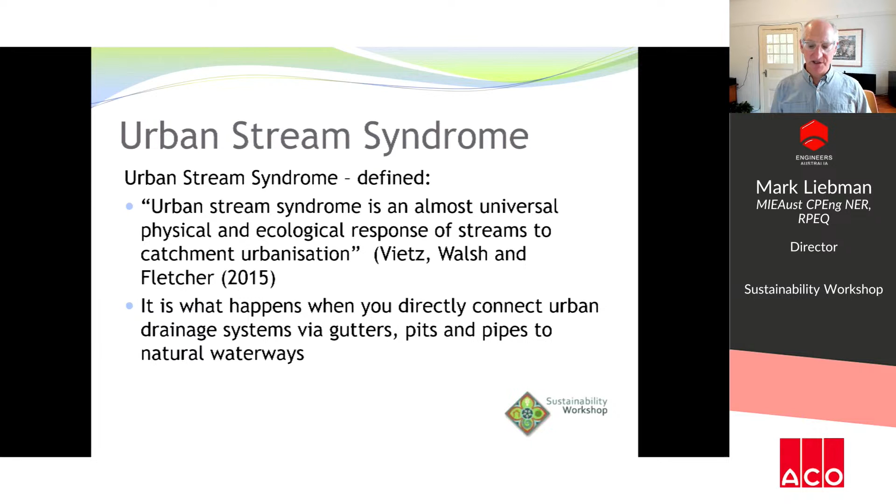This slide shows the hydrology of a natural forested land use at left. Most of the precipitation that falls on the forest returns as evapotranspiration. Some of that water infiltrates where it provides absolutely significant base flows, which sustain our creeks through dry periods. And you get a small amount of surface runoff that happens very infrequently.

If you compare that to the urban water balance shown in the middle of the screen, you can see there are some pretty dramatic changes. Very little of the precipitation that falls is returned back to the sky through evapotranspiration because we simply cut down all the trees. You get a dramatic increase in the frequency and volume of surface runoff, and obviously the quality of that surface runoff is degraded quite dramatically. And it's also logical that if you seal the land, you stop infiltration. Using water-sensitive urban design, we have an opportunity to try and restore some of that water balance.

We can see the changes in numerical terms in this slide. I took the opportunity to model a 1 hectare forested land use in the Hunter Valley, and that served as the pre-development scenario. I modeled what happens when you convert that forest into 1 hectare of industrial land use, which is completely sealed. The frequency of surface runoff changes from once every 2 years to 70 times per year.

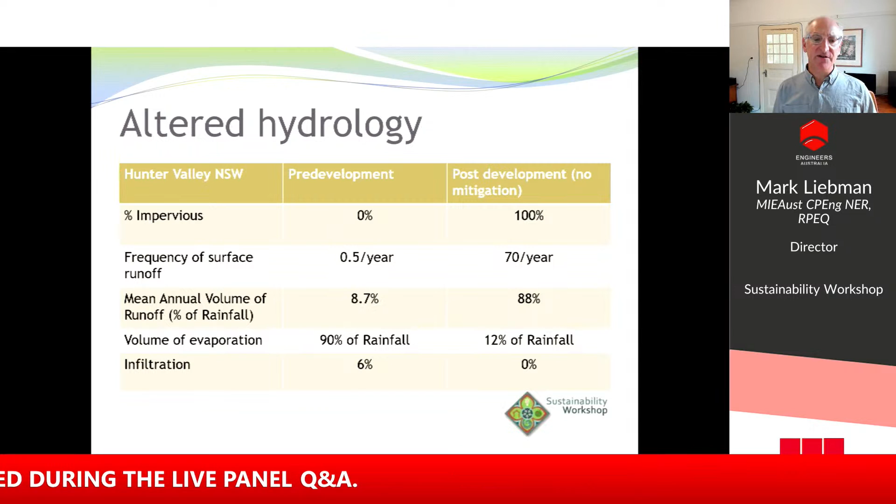Mean annual runoff volume has a 10-fold increase, and the volume of evaporation reduces by 7 to 8-fold. We lose all of the water that goes into the ground as infiltration.

I had a 40-year, 6-minute time step model. Pre-development, we found that we generated 20 runoff events, but post-development, we generated 2,760 runoff events in 40 years. You can imagine the impact of this increase in the frequency of runoff on the macroinvertebrates that would inhabit the waterways downstream of this hypothetical development.

Ladson, Walsh, Fletcher, Cornish and Horton have also been researching in this space. They've shown the correlation between stream health and total imperviousness. Imperviousness here is defined as the degree that impervious areas are directly connected to the receiving water.

For example, a shed in your backyard which doesn't have any gutters or downpipes and which is surrounded by green lawn is said to be disconnected. However, your house roof or a building roof which has gutters and downpipes and which is directly connected to the receiving water is literally directly connected.

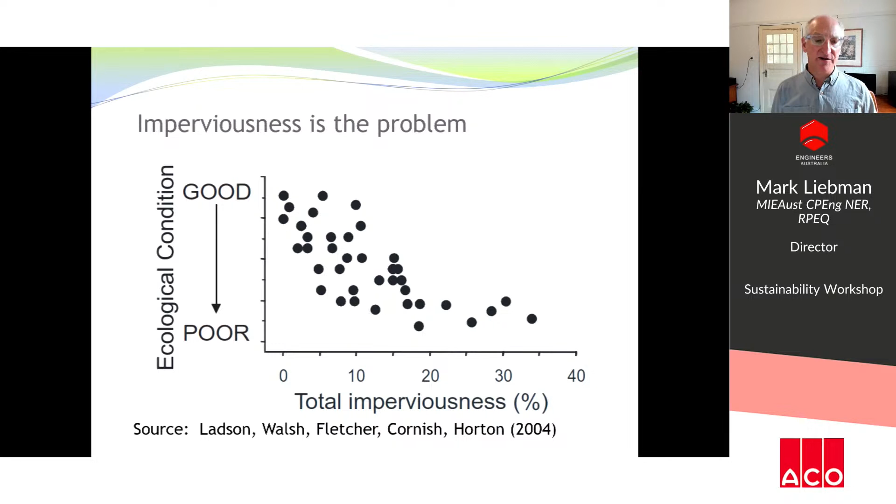So what is the solution? The solution is simply to find ways to disconnect the stormwater and to restore some of the lost water balance. Mimicking pre-development hydrology is a really big ask, and I don't think that we have the technical knowledge to do that at the moment. We may at some point in the future.

Rainwater harvesting and infiltration result in degrees of disconnection. Even small tanks and infiltration systems work really well to mitigate the impacts. Obviously, larger tanks and larger infiltration systems will work better, though there are diminishing returns.

In the past, every plumber could install a rainwater tank and build an absorption trench. This was standard practice in many parts of Sydney. It still is in the upper mountains where I live, and this may explain why our creeks are still in pristine condition.

The challenge of infiltration - there are certainly lots of challenges and limitations. It's not a practice that you can apply everywhere, but where you can, it works really well. Infiltration works really well in the short term. It can also work well in the long term if designed with effective pre-treatment, which is also maintained.

Without pre-treatment, sediment can cause clogging of the infiltration system, and this will reduce the performance over time. Our case study focuses on pre-treatment, and it demonstrates the importance of pre-treatment.

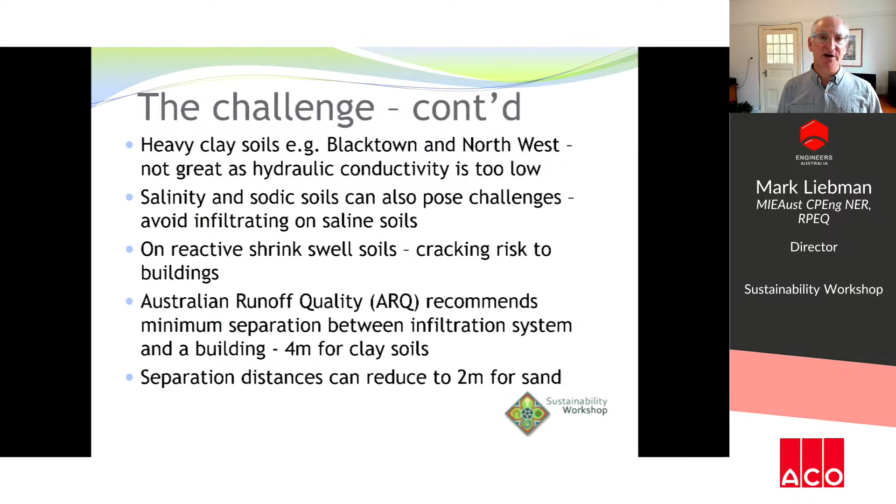I just wanted to share an absolutely excellent design reference. This is the WSUD Basic Procedures for Source Control of Stormwater, edited by John Argue and including other authors like David Pezzaniti. It includes a wealth of research by John that summarises his findings over pretty much a lifetime of researching permeable pavements and infiltration solutions. You can grab a student edition of this document on the web.

So how can we model infiltration systems? We can use MUSIC, which is a continuous simulation model. It's great for working out infiltration volumes and particularly good for helping you understand how frequently those systems are going to fill with water and spill.

I also use DRAINS software by Watercom. Actually, I typically use both softwares to check my designs because most designs are done to a specific design storm recurrence interval, for example a 1 in 3 month storm event or 1 in 5 year event. But you also need to know how these systems are going to perform on a daily basis. Recent updates to DRAINS make it much more flexible in the way that it models infiltration systems.

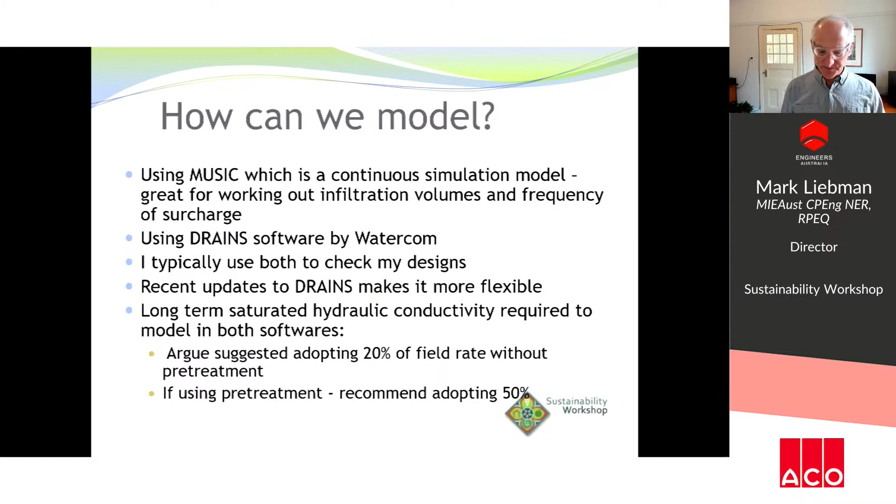So now we move on to the case study at Umina Beach. This project is located on the central coast of New South Wales. Central Coast Council were lucky enough to get a pretty sizable grant to construct a regional state-of-the-art skate park and pump track and sports facilities.

The problem that Central Coast Council were dealing with at Umina Beach was really challenging. They were dealing with extremely flat grades, poor piped infrastructure, and water ponding for prolonged periods of time in the car park, causing nuisance flooding to residents. There was also absolutely no discharge opportunity. We couldn't discharge to the ocean - an ocean outfall would have absolutely been knocked on the head. And we had no other piped infrastructure to connect into. Infiltration was the only option.

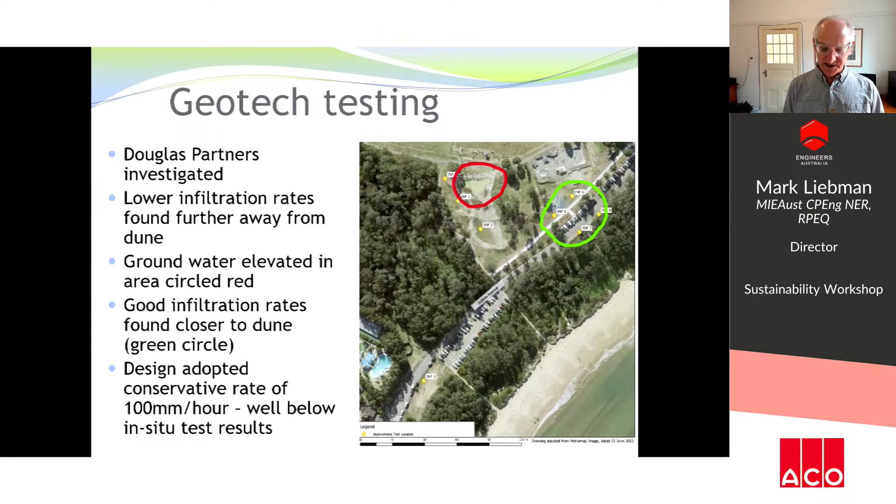So the solution at Umina involved bringing together 2 infiltration systems. The first system is the Hydrocon permeable concrete pipes, and the second system is the ACO StormBrixx geocellular stormwater management system. Hydrocon permeable pipes are a water quality treatment device - they provide the pre-treatment to preserve the life of the geocellular system.

They are made from permeable, no fines concrete. Water passes through the pipe walls and into the gravel surround. Research undertaken in Germany has measured the exfiltration rates of those pipes under different head conditions. The pipes play a critical role - they retain the majority of the sediment within the pipe while allowing water to permeate through the pipe walls. They're very easy to maintain.

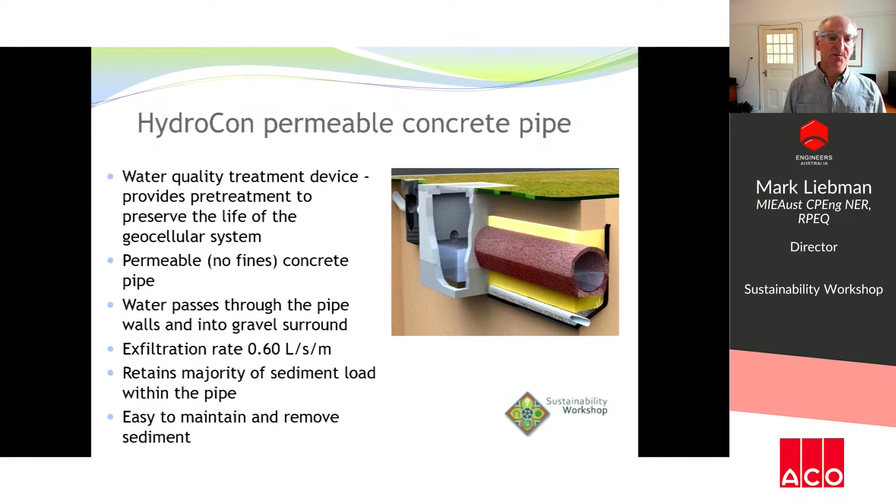ACO StormBrixx provide cost-effective underground storage. They have a porosity of over 95%. They're also backed by research undertaken by CIRIA in the UK, where use of infiltration for flood mitigation is mainstream. They have been designed to consider a creep failure mechanism for repeated loading, and they provide access for maintenance.

The design solution at Umina was to place a 500 mm HydroCon pipe inside a gravel trench and to have 2 rows of StormBrixx each side of the gravel trench.

Water comes into the concrete pipe from the road, it passes through the pipe walls while the sediment is retained inside the pipes. The water seeps into the gravel trench and then into the storm bricks. Water can seep out of the hydrocon pipe at a much higher rate than it can infiltrate into the ground. Therefore, water would build up inside the trench and be stored inside the storm bricks. Water would continue to infiltrate until the end of the storm event.

There's a major system overflow whereby high flows are allowed to flow through the hydrocon pipe system and into the parkland beyond.

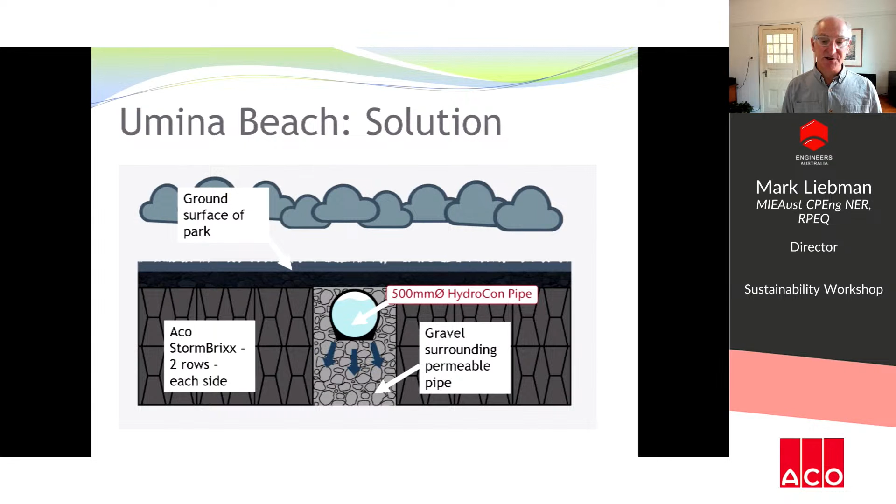I wanted to briefly review a number of projects that have helped inform the thinking, and have informed a lot of research and knowledge gained using these different products over time.

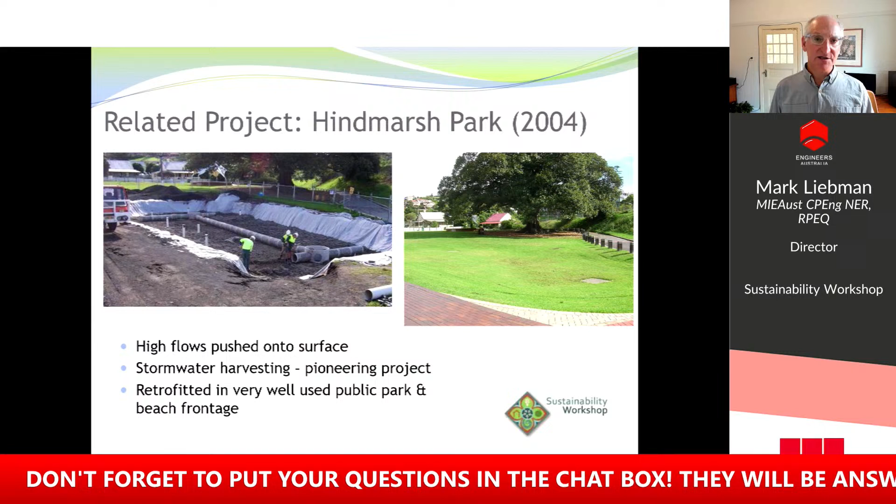The first project is located at Kiama in a well-used public park next to Black Beach. The system uses hydrocon pipes located within a grassed storage basin. Under low flow conditions, water flows into the pipes and seeps out into the surrounding sand media. Under high flow conditions, water surcharges up out of those pits and ponds in the basin, where it can flow vertically down through the sand media and be treated before being discharged.

Another project that we applied the same thinking on is the Ashgrove Estate in Regents Park. Here we treat stormwater initially in a gross pollutant trap. The water then flows into hydrocon pipes where we settle out any remaining sediment.

From there, under low flow conditions, water seeps through the walls of the pipe, and under high flow conditions it reports to the surface inside a detention basin. This detention basin is used for both water quality and flood mitigation purposes. Most of the time, the basin is a valuable public open space resource and it's very well drained.

A key take-home message here is that space in Sydney is at an absolute premium, and that we don't need to sacrifice public open space by sterilising that space with a stormwater treatment system.

A similar approach has been adopted by Blacktown Council for their bioretention basins, where permeable pipes are used to trap any sediment that passes through the upstream gross pollutant traps. In this context, the permeable pipes are designed to protect the filter media and to ensure that filter media, constructed in large part using very precious virgin natural sand resources, lasts as long as possible.

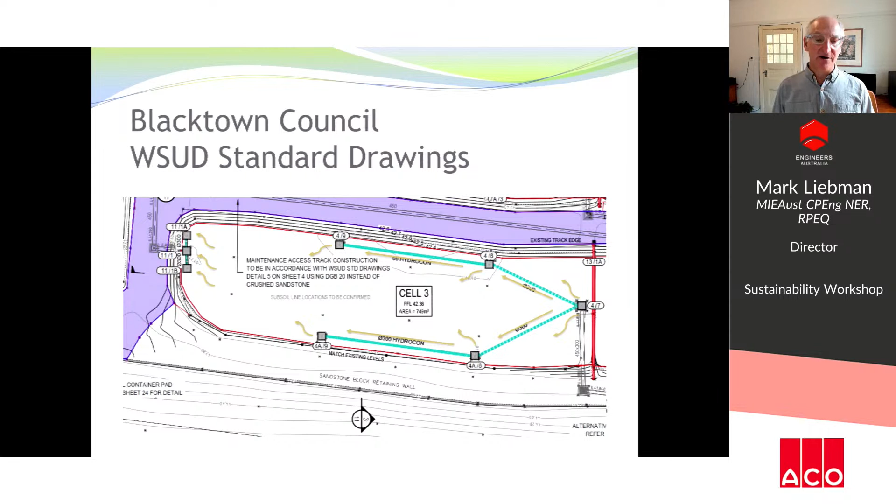I've also undertaken hundreds of smaller and larger infiltration projects in the Blue Mountains over the last 10 years. Absorption is a deemed to comply solution under the council's DCP.

Using ACO StormBrixx is a much more cost-effective solution than a traditional trench filled with gravel, which is only 33% porous, meaning only 1/3 of the volume of that trench is available to store water. You can compare that to the storm bricks, where 95% of the volume is available to store water. It means a much smaller footprint, less excavation of natural soils, and less waste management.

I wanted to talk briefly about maintenance, which is absolutely critical. It's really important to understand that if you can't maintain a system, then it is going to fail. That's a given. The first generation systems installed on the Central Coast lasted between 5 and 10 years before failing. I understand this to be more or less in line with John Argue's research.

All of the approaches shown today have maintainability built in from the start. Ensuring access for maintenance vehicles is critical — they need to get in close to be able to maintain these systems at a cost-effective price.

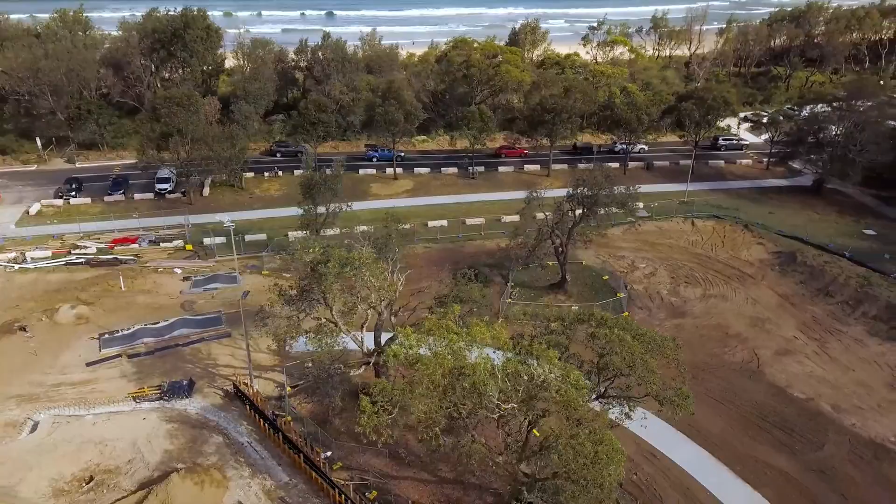According to a council representative, surface stormwater runoff on Sydney Avenue originally flowed to a trapped low point, consisting of a single pit with small PVC pipe outlets that regularly became clogged and took several days to drain to the adjacent reserve. The whole purpose of this project was to get the water away from the car park and put it underground, so it can naturally go into the subsurface.

The site was heavily constrained by the existing stormwater network, insufficient pavement falls, its surrounding topography, and environmental restrictions placed on ocean outflows. A solution would need to overcome these factors and function with the area's high annual precipitation and worsening summer storms. For this project, various drainage constraints meant treating stormwater at the source was the only feasible option, as opposed to treating water at the end of pipe.

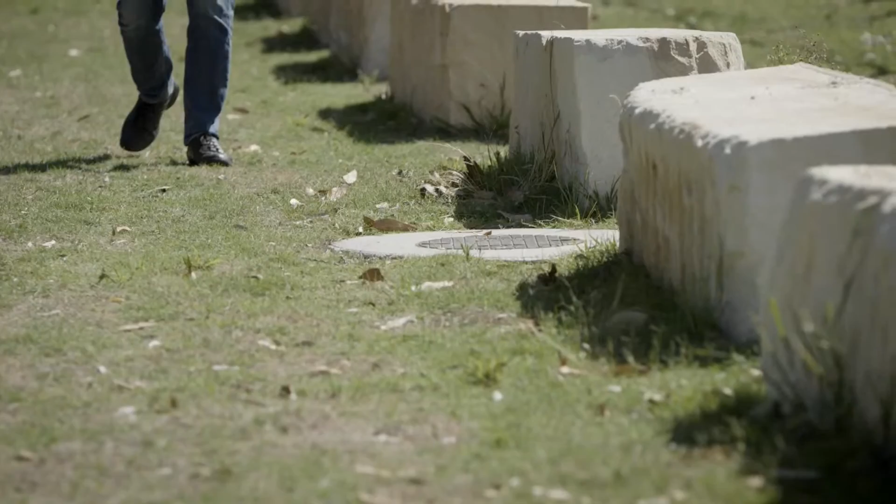Adding to the downstream stormwater infrastructure was simply not an option, except through an overflow pipe. As the sandy soils in Umina enable high infiltration rates, Central Coast Council sought to integrate an underground infiltration tank with an upstream treatment device.

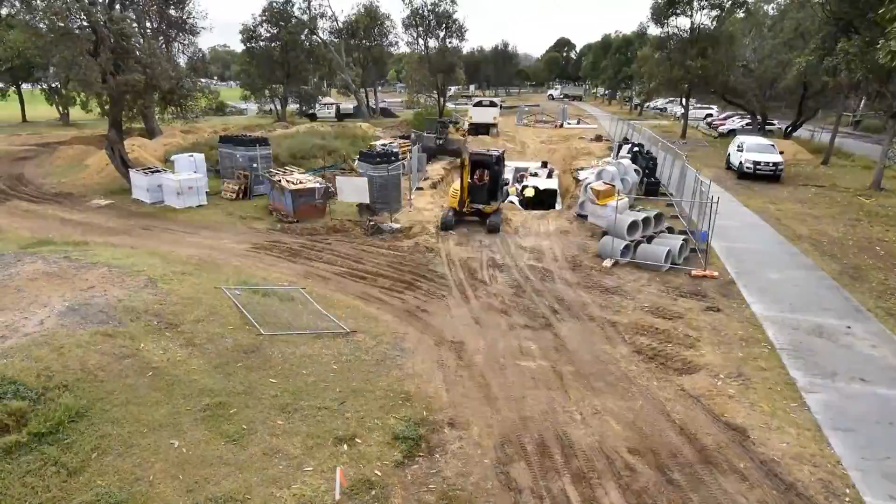Adjacent to the existing concrete footpath running alongside Sydney Avenue, Hydrocon permeable concrete pipes were installed between two twin ACO StormBrixx tanks, totaling 63 metres. The system needed to store the stormwater volume of a 1 in 5 year storm event.

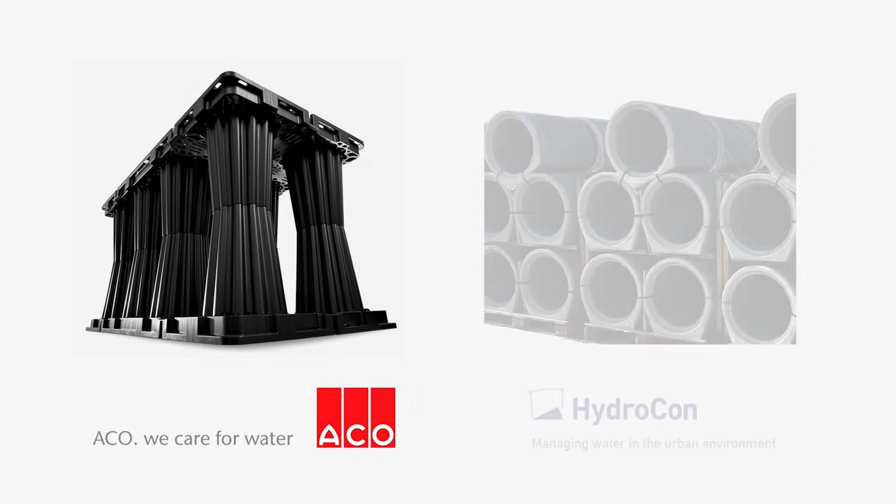This was a really unique project because it gave us the opportunity to bring together two great products, the ACO Stormbrixx and the HydroCon pipes. Whilst these products are often used independently, this project is the first in Australia bringing two manufacturers together to create an intelligent solution.

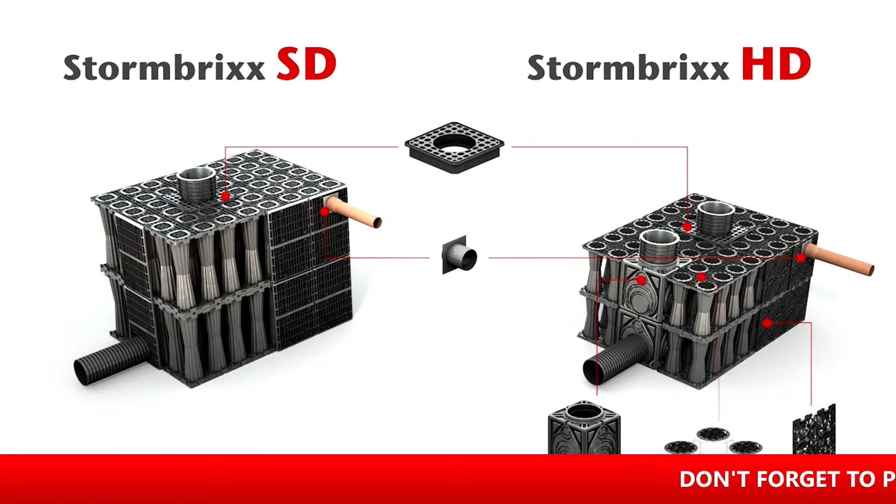ACO Stormbrixx is a unique plastic geocellular stormwater management system designed for surface water storage, infiltration, retention, and detention for light and heavy-duty applications. Strong and quick to assemble, the Stormbrixx tank offers optimum storage capacity with a 95% void ratio of total volume.

The ACO Stormbrixx provides a very affordable means of underground storage, and they have also been really extensively developed in terms of their structural integrity, unlike some of the first generation plastic products.

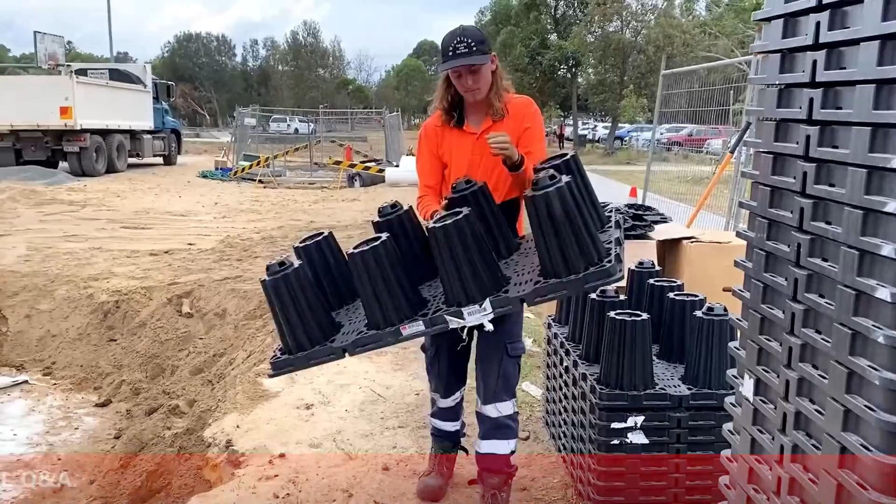According to the builder, the installation of the Stormbrixx tank was relatively simple. Once the trench floor was excavated and levelled, assembly of the plastic units was quick, with no real handling issues. They were very impressed with the system, ease of handling, how they locked together, the red clips that tied in the bottom and top levels, and the strength of the units once assembled.

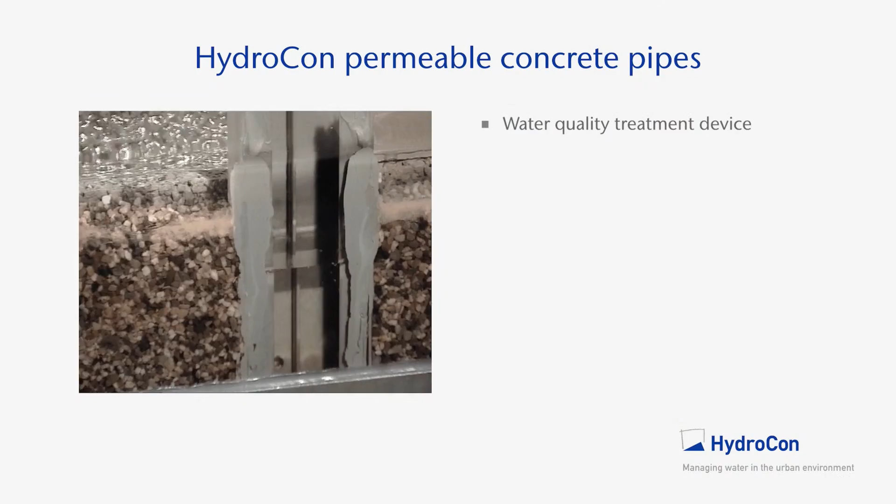HydroCon has been in Australia for over 20 years and specialises in permeable concrete pipes and pavers used for water-sensitive urban design. HydroCon permeable concrete pipes remove and retain stormwater pollutants within the pipes. Treated water exfiltrates through the walls of the pipes and is delivered to the subsurface of bioretention and stormwater filter systems. This prevents clogging and allows easy maintenance, also reducing the life cycle cost significantly.

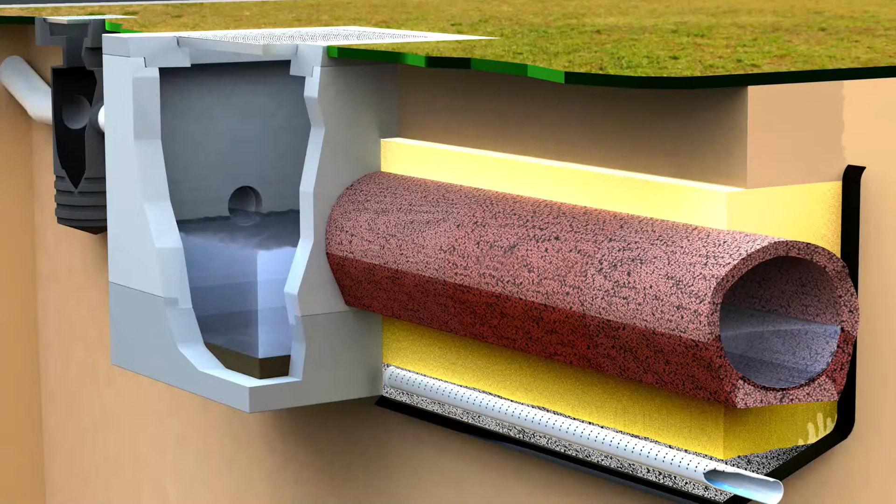Our products reduce runoff, local flooding, and improve water quality. Stormwater treated by HydroCon products can then be harvested for reuse or infiltrated directly into the ground.

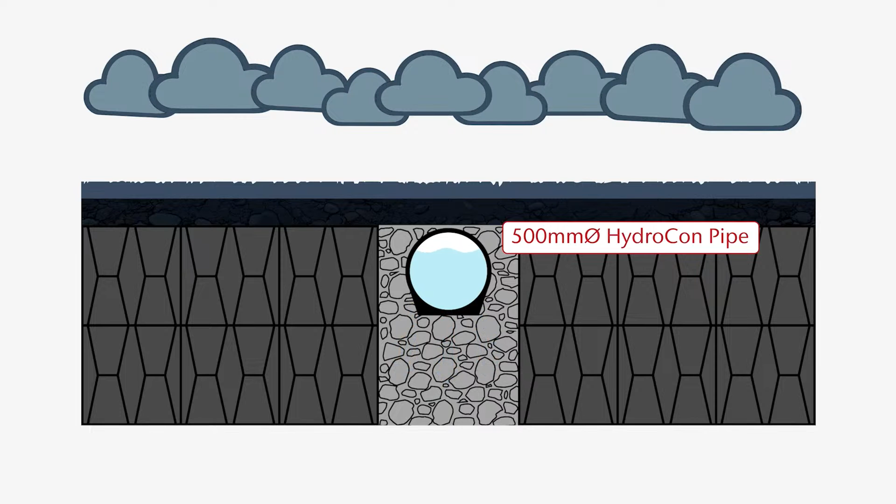Stormwater is collected from the roadway and directed to the HydroCon pipe system. The stormwater is then treated as it exfiltrates through the permeable structure of the HydroCon pipes and into the surrounding gravel. The water then enters into the geotextile wrapped Stormbrixx tanks for temporary storage.

During a storm event, the water table surrounding the tank rises. The tank allows excess water to be stored until the water table begins to drop following the storm event. The stored stormwater then exfiltrates through the geotextile wrap and drains naturally into the earth and water table beneath.

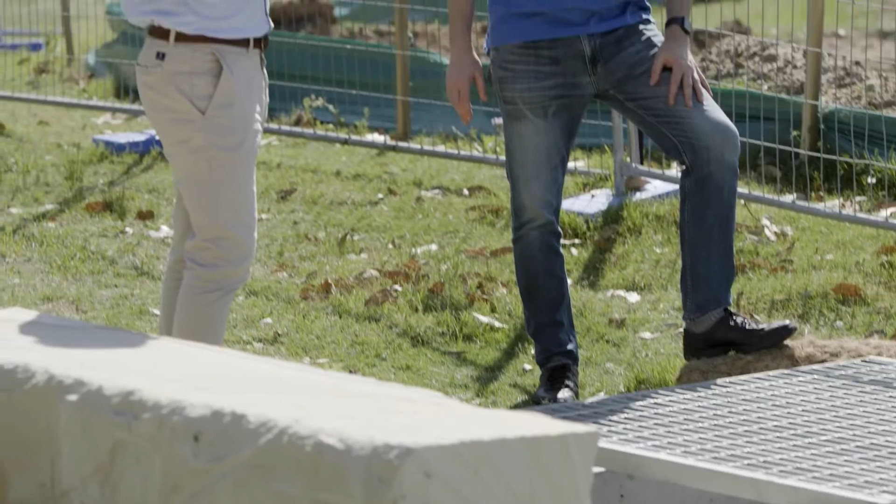Stormwater pollutants are retained inside the HydroCon pipes for removal during periodic maintenance. The infiltrated water through the soil has the added benefit of replenishing the local groundwater close to the tanks.

HydroCon pipes have a flat base that allows them to be easily positioned and quickly installed. They connect into each other and are laid at a zero gradient.

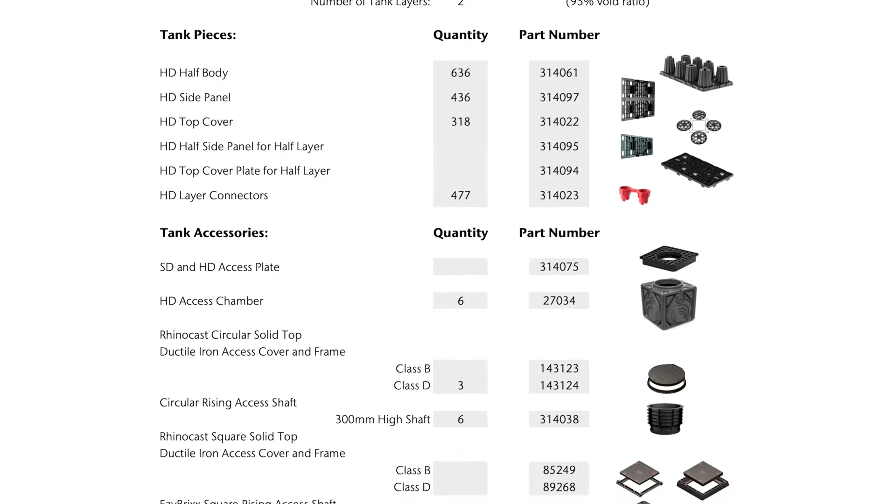At ACO, we are always ready to support customers with any design questions they may have. Initial communication with Central Coast Council was to provide information about the Stormbrix HD tank, the footprint, tank size, what volume, and what they needed from our product to achieve that sort of volume, and how it can be integrated with the Hydrocon pipe. We provided a bill of materials, a structural calculator based on CIRIA C680 to make sure the tank was going to be functional and performing to load requirements. Finally, a detailed tank installation drawing was provided to show the tank layout and location of the access points.

The ACO Stormbrix and Hydrocon system offers easy maintenance and inspection throughout its design life. Hydrocon pipes let water go through while keeping all the sediment and gross pollutants on the inside of the pipe, where they can be vacuumed out.

So they work as a really high quality filtration device. And what it does is it reduces the maintenance burden on the ACO Stormbrix, and we can extend the maintenance period on the Stormbrix right out.

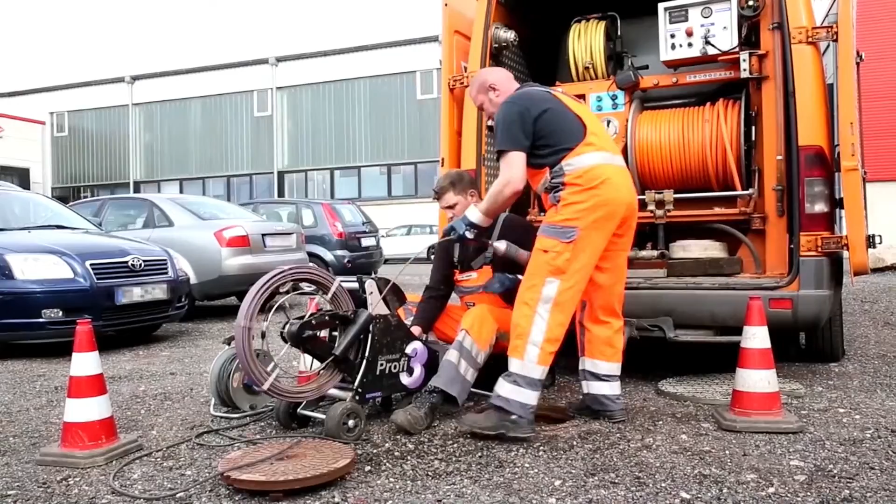First generation systems were completely closed up and you couldn't get inside them to work out how much sediment was in them, or even remove the sediment if they were full. The second generation systems, like the ACO Stormbrix, are open and accessible, you can get CCTV inside them, which makes life very easy for the guys doing the maintenance.

They simply drop a vacuum hose down it and a high pressure jet, and push all the pollution to one side and then vacuum it out of one of those pits. This system provides Central Coast Council with an easy to maintain and cost-effective infiltration system.

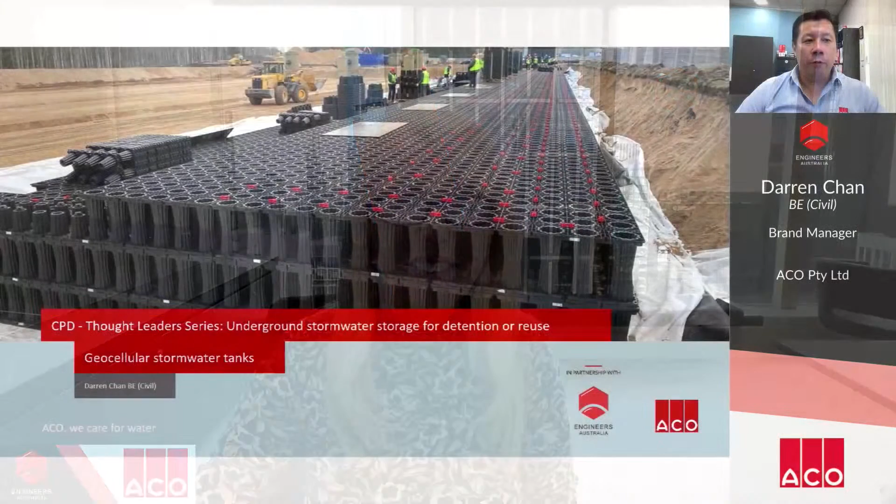Over the next 25 minutes or so, I'm going to describe the role of these plastic tanks, their characteristics, and offer you a guide on how to specify them.

Underground tanks are used in lots of projects as councils legislate to protect their downstream waterways and infrastructure. Managing both the quantity and quality of water being discharged off a site is only going to grow in importance, particularly as our cities urbanise and rainfall events intensify as the climate changes.

These days, larger areas of the built environment are being covered by impermeable surfaces, which increases the risk of flooding. Tank solutions are a conventional way to store and slow down surface runoff to pre-developmental rates, as well as replenish the groundwater at a more natural rate.

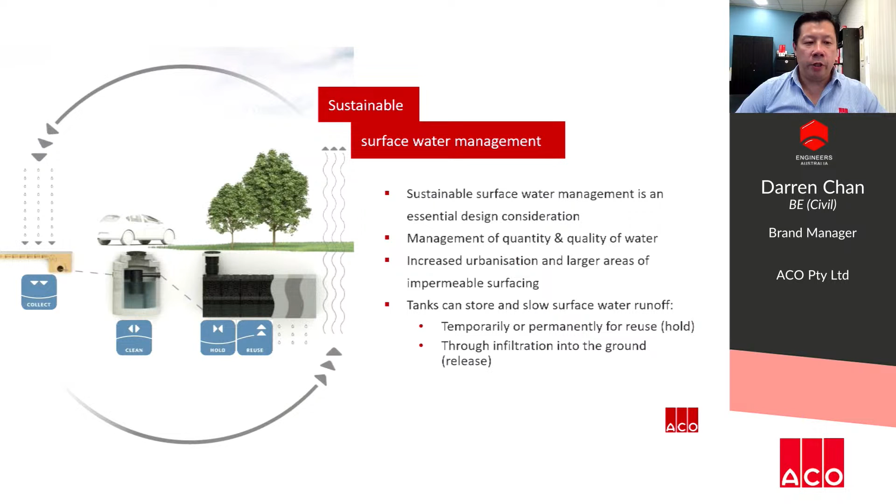These are the system elements that are designed to work with the natural water cycle. On a slab or pavement, drains are typically positioned to intercept or collect stormwater runoff, which is then treated or cleaned to prevent clogging or contamination downstream.

Some of the engineered tank solutions include cast-in-place, precast concrete tanks, arches, and plastic structures. We'll focus today on just plastic stormwater tanks, which can be easily integrated in a stormwater management plan for the infiltration, retention, or detention of surface water runoff.

Detention systems, also known as attenuation systems, are designed to spread the peak flow of a storm event. It does this by holding and releasing stormwater slowly, controlling the runoff to reduce the risk of flooding downstream from a development.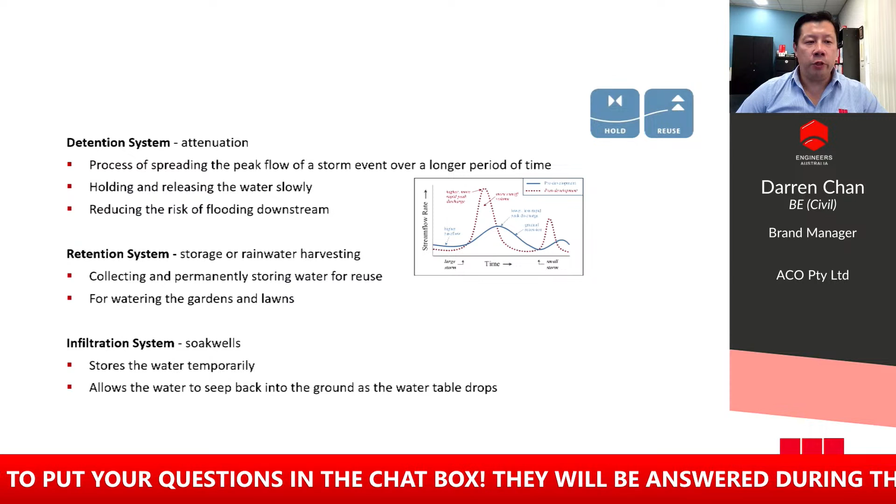A retention system collects and stores water permanently for reuse, for example, to water landscape areas or for firefighting purposes. Infiltration systems, or soak wells, are used a lot in sandy areas to temporarily store water, allowing it to naturally seep back into the ground to replenish a dropping water table.

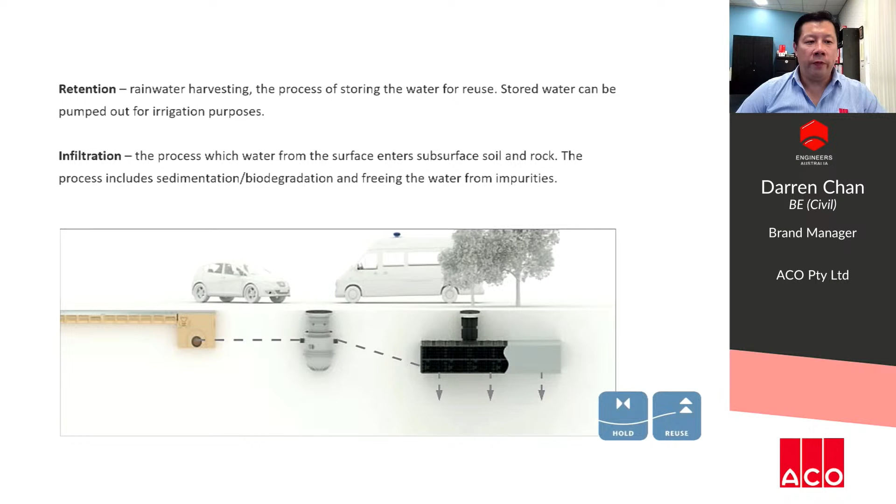To illustrate this, retention and infiltration are two common adaptations of these tanks to make the best use of captured stormwater. Retention is for irrigation or reuse purposes. Infiltration is where the soil can naturally free the water from impurities. In both cases, the water is used at or close to the source of collection without it flowing through to any downstream infrastructure or receiving waterways.

But if discharging into downstream infrastructure is the objective, then detention gives designers the greatest control over the quantity of water to enter it. In very simple terms, it's an easy calculation.

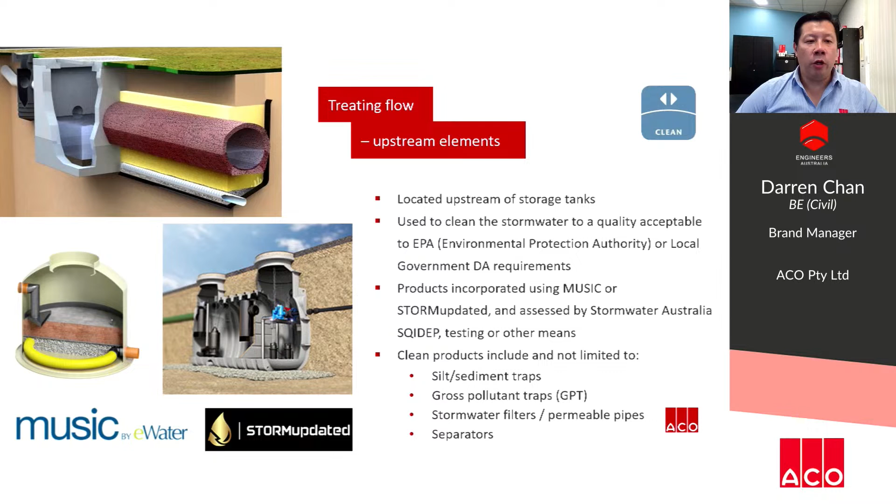Before I go on, I want to make special mention of two types of hydraulic control structures. First are stormwater treatment devices. These are located upstream of the tank, with their performance being individually assessed and governed by the EPA and local DA requirements. Depending on the project requirements, there are many types, from gross pollutant or silt traps, stormwater filters, permeable pipes, to even light oil separators used where hydrocarbons exist.

The other type of hydraulic structure are flow control devices, which control the release of water to prescribed rates downstream of the tank. These are typically installed in chambers with either purpose-designed mechanisms or just a conventional orifice plate. Both these hydraulic control structures aren't the topic of today's presentation, but I wanted to mention them as they are essential elements that affect the quality and quantity of water being discharged off the site.

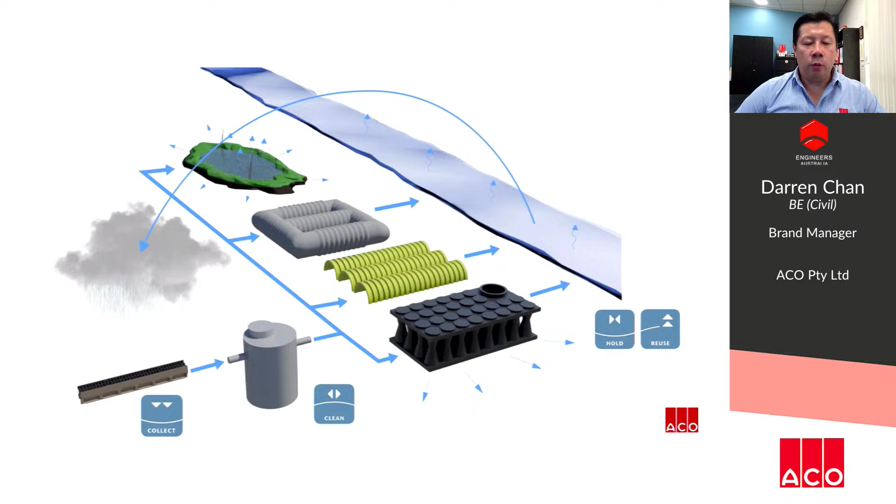So today, I'm going to focus on plastic tanks that can be assembled into producing underground cells for water storage. These can be adapted in a softscape where infiltration can be achieved. Here you can see them assembled, wrapped, and backfilled. They can be installed under slabs in commercial and industrial applications where space is a premium.

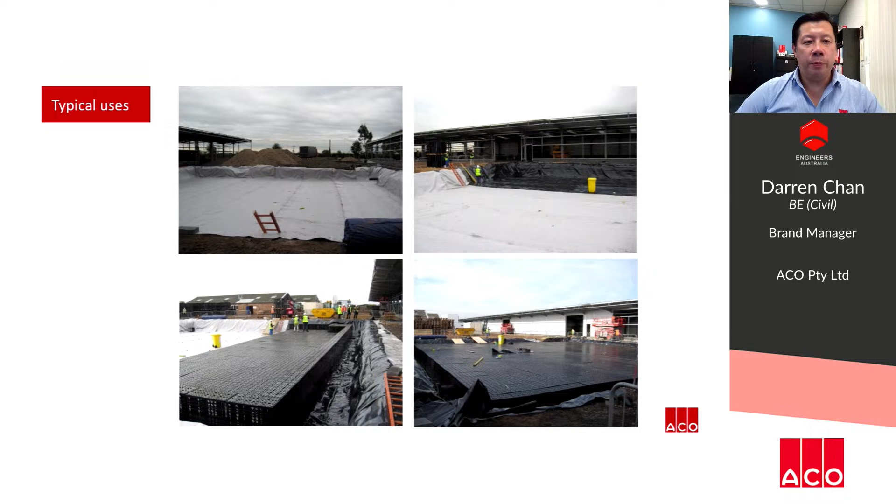This is an example of a tank being used for detention in Griffith, New South Wales. Designers had to deal with runoff from the site. The tank would store and gradually release the stormwater runoff into the council's downstream infrastructure, while also allowing direct access for watering the sports fields.

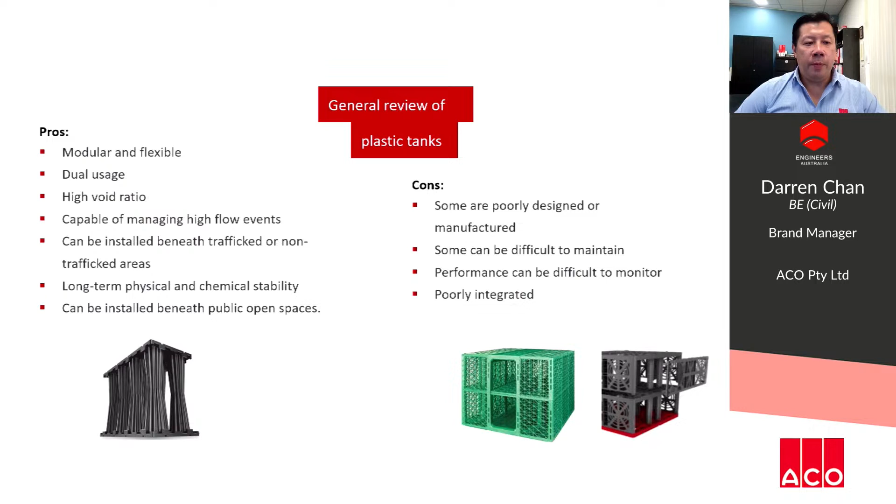Finally, the designer must ensure these products are integrated and meet the quality and durability requirements of the stormwater management plan.

So, when specifying plastic tanks, there are a number of things to consider. Councils, through their development control plan, will enforce compliance to regulations. They will specify the methods an engineer needs to use to ensure the property meets the stormwater management plan. This takes into account the volume of water that the property needs to manage from landscaped, hardstand, and roofed areas. Not only does the certifying engineer need to integrate the tanks properly, but as with all key stormwater products, the structures themselves need to meet minimum strength, durability, and quality requirements.

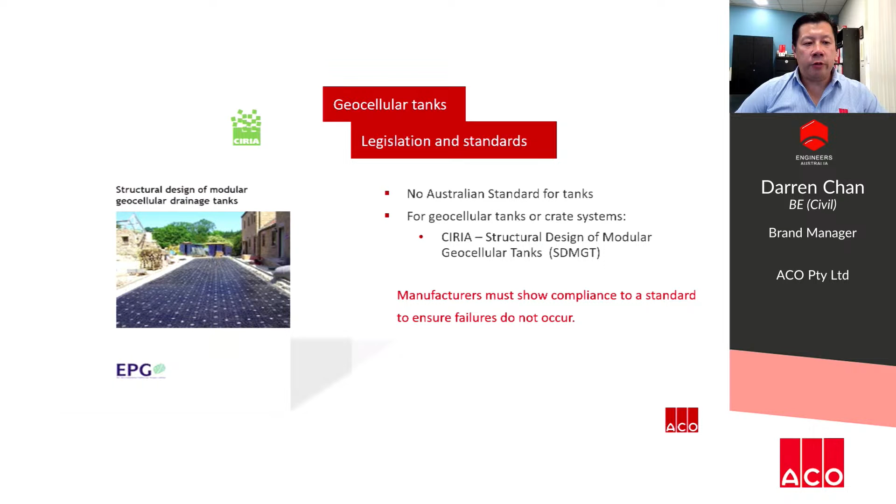In Australia, there are no standards that govern plastic tank systems. And the problem with that is that some manufacturers make claims about strength and design life that just aren't substantiated. However, there is a UK standard for plastic tanks called Structural Design of Modular Geocellular Tanks. It gives guidance on testing, structural design, construction, and installation. This is the gold standard to benchmark performance, and as such, manufacturers should qualify their products to this standard to ensure that failures don't occur.

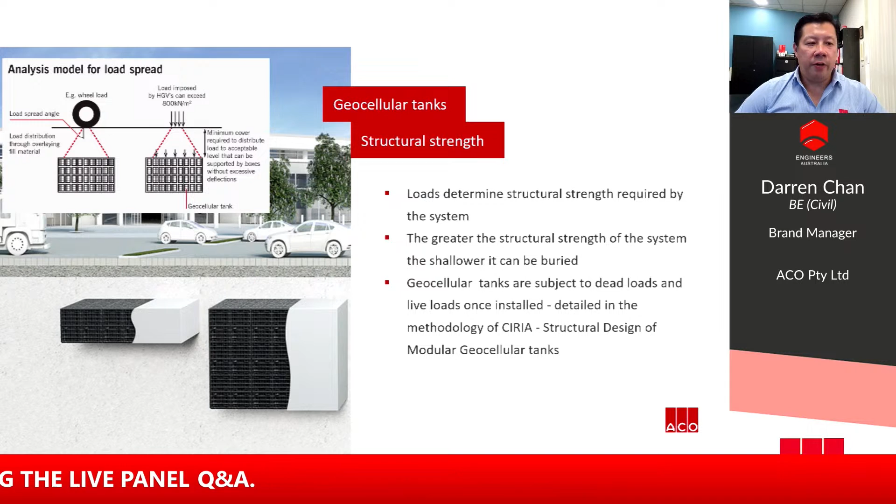A structural design should consider the load-bearing capacity of the tank. The stronger the tank, the shallower it can be buried, resulting in reduced construction costs. What determines the depth of cover required are things like the soil type, tank design capacity, groundwater level, pavement thickness, and design loads. The UK standard identifies these as the main factors overlooked that contribute to failures. And manufacturers must be able to come clean on their strength data and prove it with independent testing. To address all this, the UK standard has detailed all the requirements for laboratory strength testing.

And when considering loads, both short-term and long-term loads must be addressed. Dead loads include the mass of soil surrounding the structure, plus the weight of slabs or anything else permanent that a tank will be subjected to. Live loads are temporary loads like vehicles, which also need to be considered. Tanks that have vertically aligned load-bearing pillars will offer good vertical strength and stability, and manufacturers should be able to provide you with independently tested vertical load results.

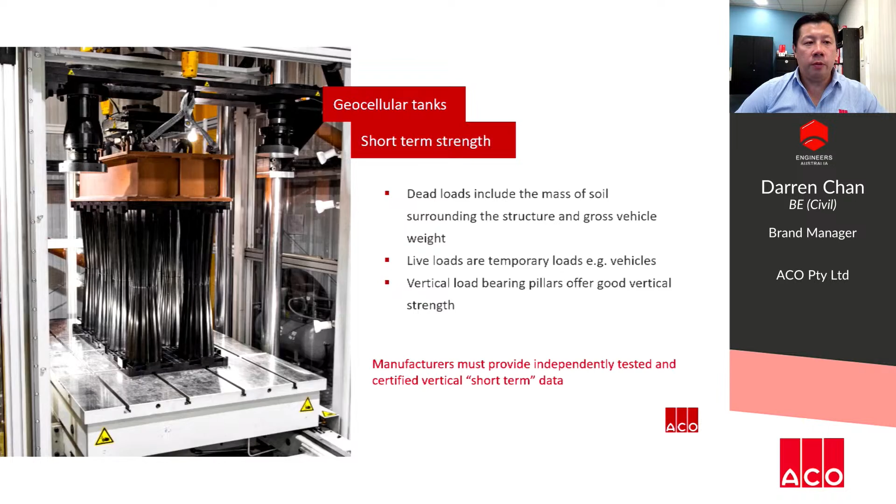Lateral loading is as important as vertical loading and takes into consideration soil mechanics. This is the key driver to how deep a tank can be installed. Be aware that specifically in high water table applications, tanks can be pushed out of the ground. So in these instances, either locate the tank close to the surface to avoid the water table or beneath a heavy pavement to anchor it down.

Great emphasis should be placed on jointing methods. Systems that use a combination of brick bonding and cross bonding allow for a more rigid tank construction. Again, manufacturers should provide independently tested and certified lateral load data. This is to justify the installation depths they recommend for your project.

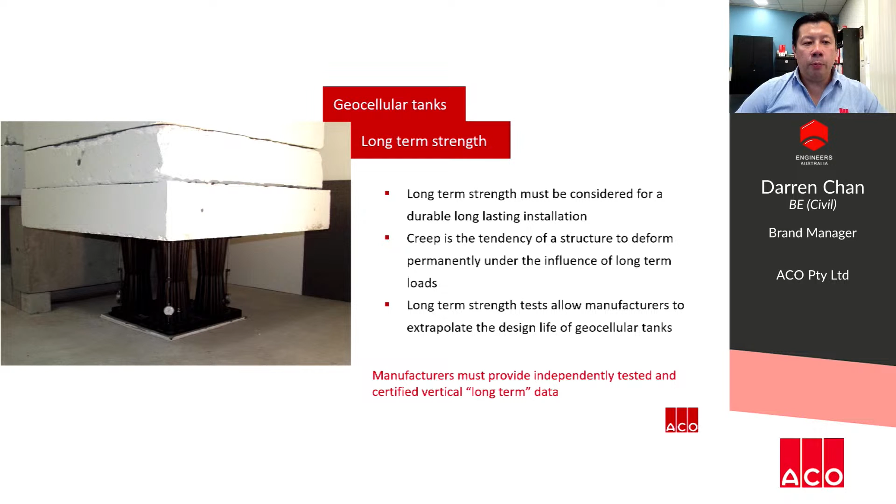Some manufacturers have a tendency to only disclose the short-term and not the long-term results of their tanks. Products need to be able to sustainably support loads over the design life of the project, which is crucial for a durable installation. Tank materials are liable to creep, meaning they deform over time, and products must be strong enough to withstand this. Long-term strength test data allow manufacturers to determine the design life of their tanks. Not appreciating long-term strength can have extreme consequences.

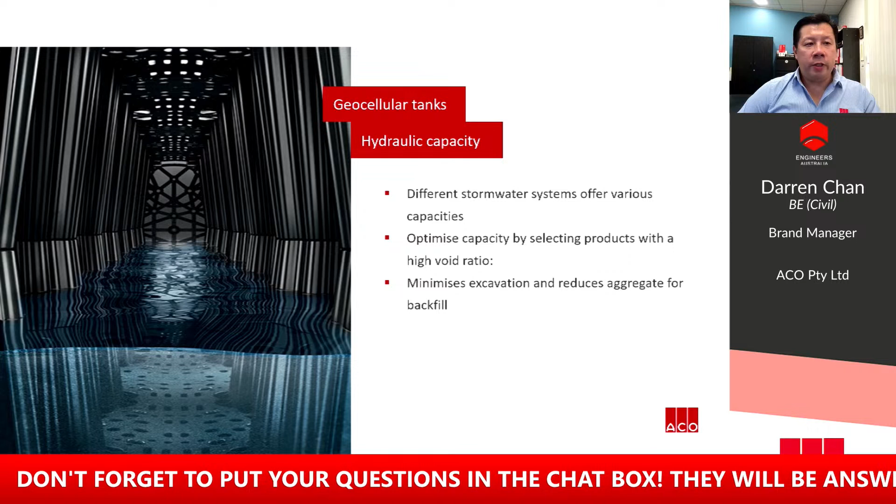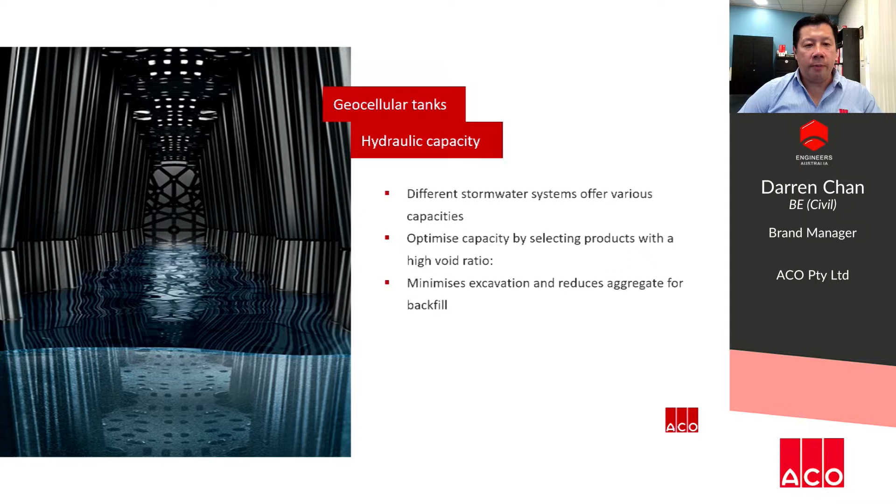For tanks, the hydraulic capacity refers directly to the volume of water that the structure can store, and different tanks in the industry will offer different capacities. You can optimize the capacity of the tank by selecting products with high void ratios, which is over 90% for geocellular systems. Having such a high void ratio reduces excavation and construction costs. Now, arch systems, for a quick comparison with geocellular systems, have a void ratio of around 50%, which essentially means the excavation needs to be almost twice the size.

Let's look at concrete structures. Although concrete tanks provide 100% water storage inside the tank, they have thick walls which reduce the void ratio to around 80%, and they are expensive to build and install. In comparison, geocellular tanks are more economical while still providing a high amount of storage.

For concrete pipes, they're obviously round, but need a square trench. Each pipe needs about 250 millimeters of sand or stone bedding and around half a meter of spacing between each run. All of this increases the excavation and fill required, making the installation bigger and more expensive. A good manufacturer should be able to help you optimize the space to meet the site's storage volume requirements.

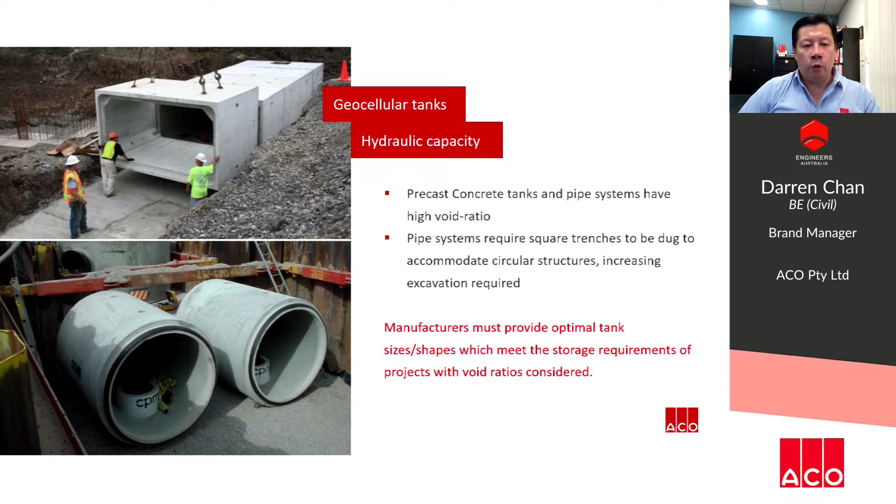A tank versatile enough to shape itself around your project will give you more options to meet a site's storage requirements. Modular tanks offer the ability to adapt themselves to an underground shape with some level of flexibility. This is particularly useful when avoiding things like existing services, buildings, or footings. Manufacturers should give you tank layouts to help you navigate the physical constraints of your project, as well as clear installation instructions.

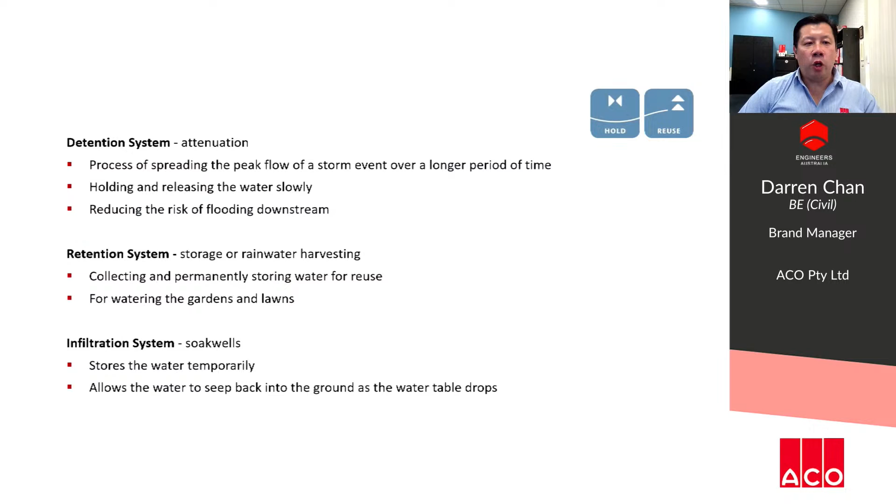As I mentioned earlier, tanks can perform any or a combination of these roles, and depending on how a tank is used, it requires a different type of wrapping. In non-sensitive retention or detention applications, geomembranes are used as the bladder for storing water with a geotextile on the outside to protect it. As long as minor leakages from the tank can be tolerated, the membrane is normally just taped together. This is used in the vast majority of applications.

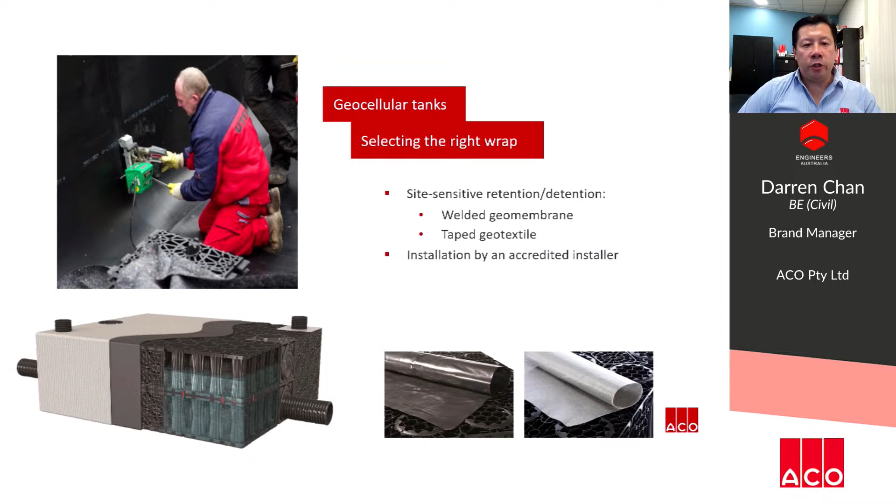But for sensitive applications, like a tank positioned close to a building or to contain contaminated runoff, we'd recommend using a welded geomembrane installed by an accredited contractor. This ensures water tightness, but as before, the geotextile wrapping on the outside needs only tape to secure it. The focus is on the integrity of the membrane.

For infiltration systems, there's no impermeable geomembrane used, just a geotextile which acts to minimize sediment buildup within the tank while allowing the water to percolate.

Stormwater tanks can be very large, and moving them to site and then into the excavation can be costly. Geocellular plastic tanks are lightweight to transport, and the modules are designed to stack inside one another, which means they take up significantly less space than other products. This leads to fewer trucks to site and fewer trips to the excavation. Not only is this more cost effective, but better for the environment.

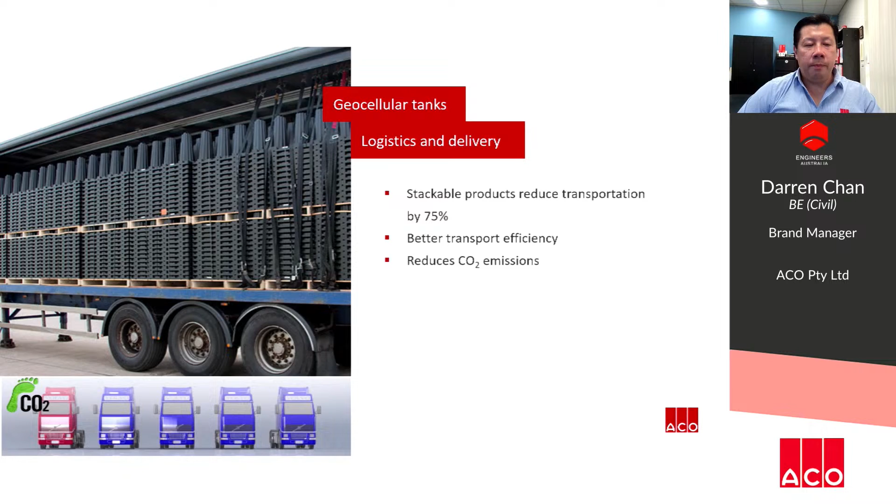The site itself should be considered when selecting a product. The time it takes to store and assemble these tanks can significantly affect construction costs. Some tanks need storage, and worse still, some tanks simply don't stack. Some plastic crate systems are generally assembled away from the excavation, then lowered in, with additional rent and labour costs associated with building and storing the tanks before installation. Geocellular stackable tanks, however, are really beneficial for sites with restricted space or labour, in that they can be built inside the excavation.

To get access to a tank, a dedicated entry point for both inspection and cleaning is needed, like the inspection chamber shown on the top right. For inspection and maintenance, open cellular tanks provide uninterrupted access from one cell to the next. This is in stark contrast to the closed-in structures of traditional crate systems. A tank that can't be maintained serves no purpose. Cameras and jets must be allowed to pass throughout without restriction.

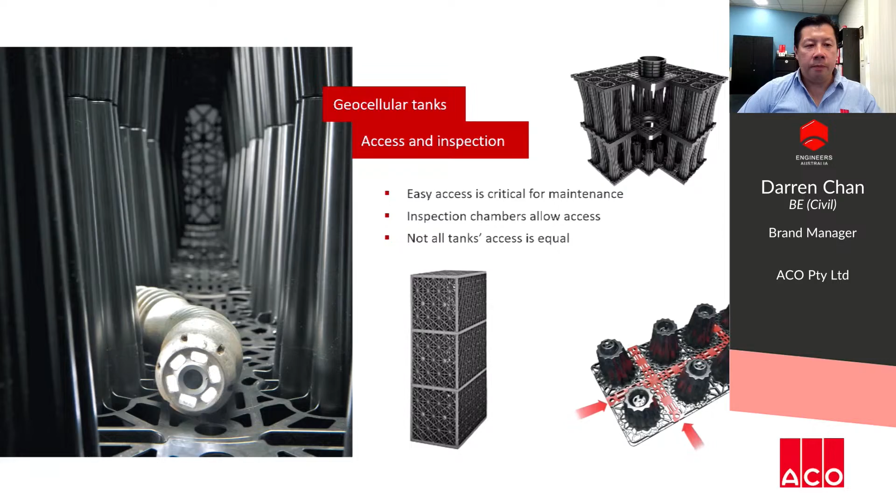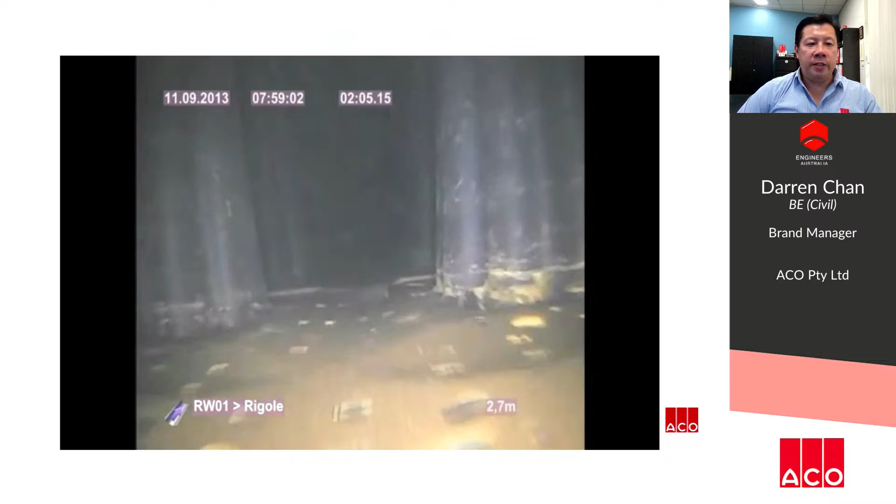Here is a short video of an inspection carried out in a modern geocellular tank design. A geocellular tank is located under a pedestrian precinct. A maintenance team has lowered a camera down a shaft through the inspection opening. You can see the camera move through the system easily without being restricted by any physical barriers in the tank. At the bottom right, you'll notice a chainage counter showing the distance travelled by the camera cable from the manhole. If I showed you the full video, the camera ends up 30 metres into the tank. This would not be at all possible in tanks constructed of plastic crates.

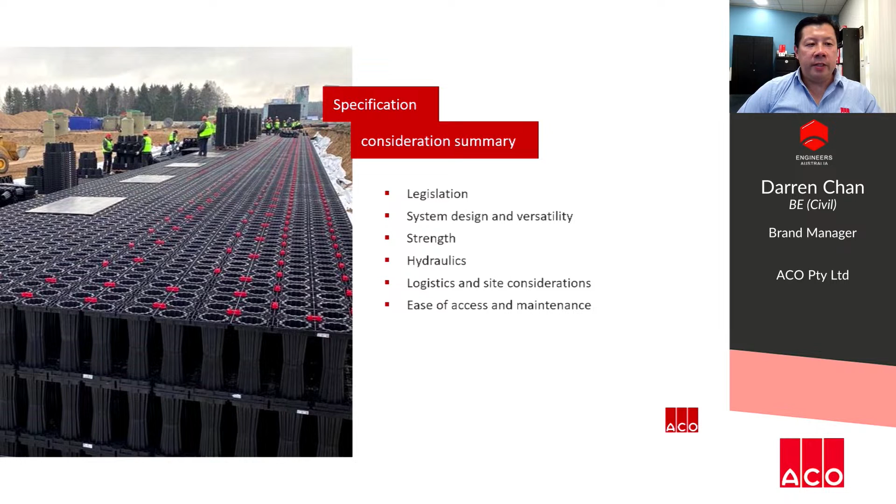We've now come to the end of our presentation, but to summarise, these are the key things to consider when specifying tanks: compliance and legislation, the tank's design and strength, the void ratios for storage, how easy it is to transport, and the ease of access, inspection and maintenance. This now ends the formal part of our CPD.

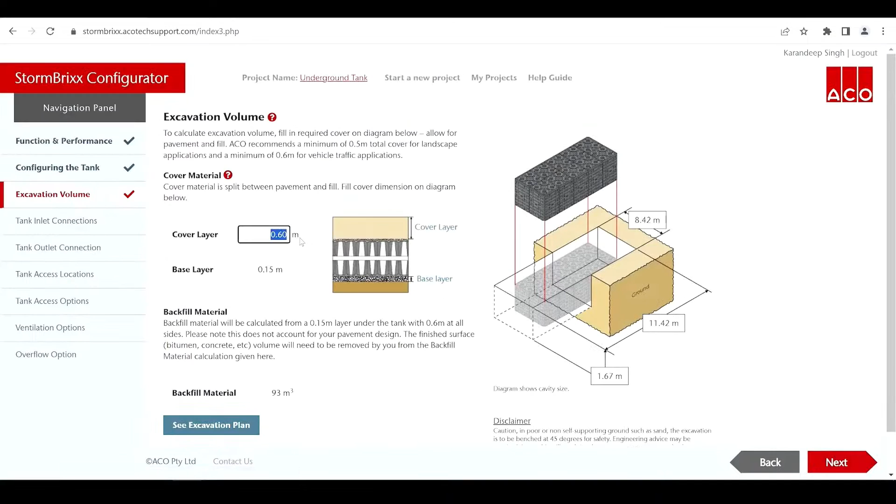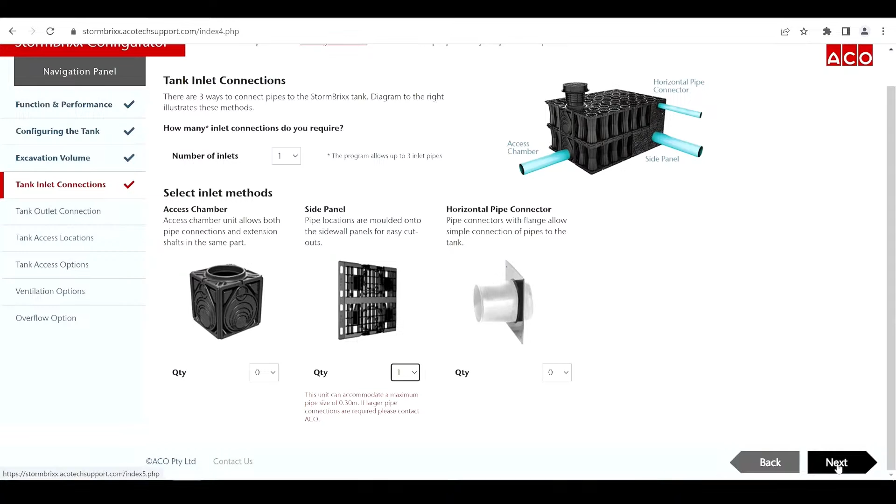Next, you enter the cover required over the tank and the program will calculate the excavation volume, and also calculate the volume of backfill required. The program is limited to a maximum of 3 inlet connections, and limited to 1 outlet connection.

Then you can roughly position the access chamber locations and any additional access points. Select your preferred access covers. And finally, add pipe connectors for ventilation and overflow if required.

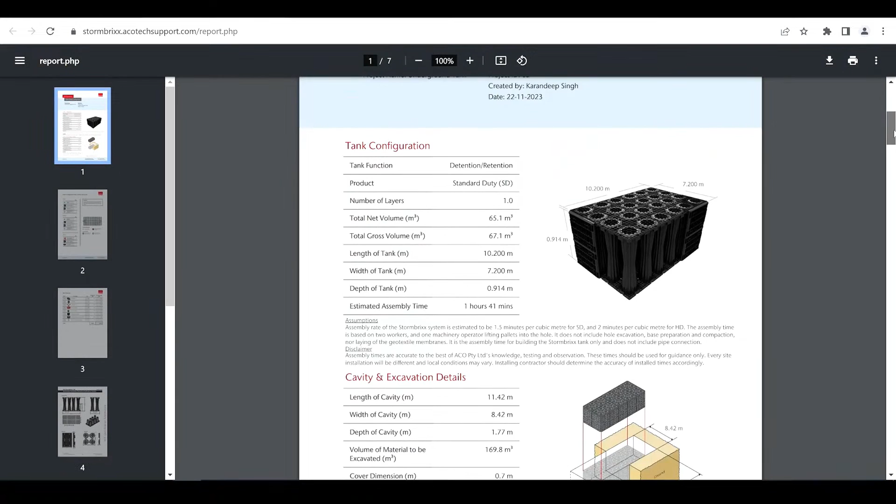At the end, press the green Get Results button for a downloadable results page containing your inputs, tank size, storage volume, and a bill of materials. A product data sheet of the StormBrixx product is also attached. As you can see, a tank can be configured within a few minutes using the new online StormBrixx configurator program.

To make the structural validations process easier, we've also designed a simple online structural calculator. It's very simple to use, and the required inputs include cover depths, height of water table, live loads, pavement type, and soil type. The results can be downloaded as a 2-page summary or a 6-page comprehensive report.

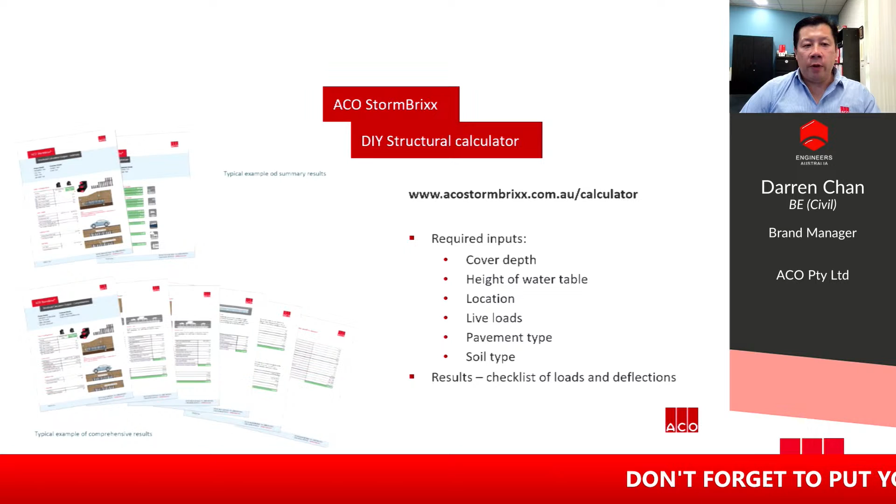The StormBrixx configurator and StormBrixx structural calculator are both available on ACO's website for you to use any time of the day. If you would like to talk to us directly, we have technical representatives across the country who would be only too happy to assist you with your next project.

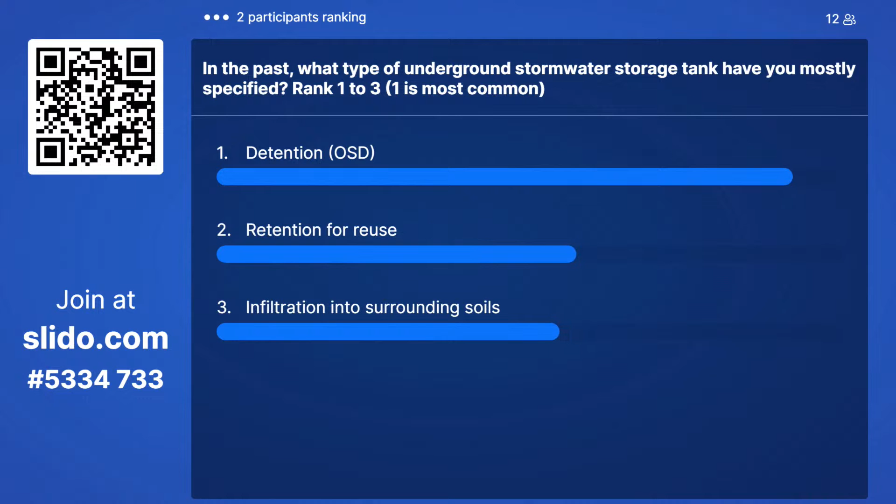And this question is more for us to understand what designers and engineers need from a manufacturer. So what we want to do is help that way, either through our technical support, through the staff we have here at ACO, or by creating more online do-it-yourself programs, so you can have access to it whenever you want. I know that all designers work at different times of the day, so with these online programs there's always access to them 24/7.

Mark, do you want to comment at all on those results? And thank you to everyone for participating in the poll. Just interesting for me to see that the tanks are mostly used for on-site detention and less so for infiltration and reuse, but really good to see that they're still reused in those applications. Well done, everybody, thank you.